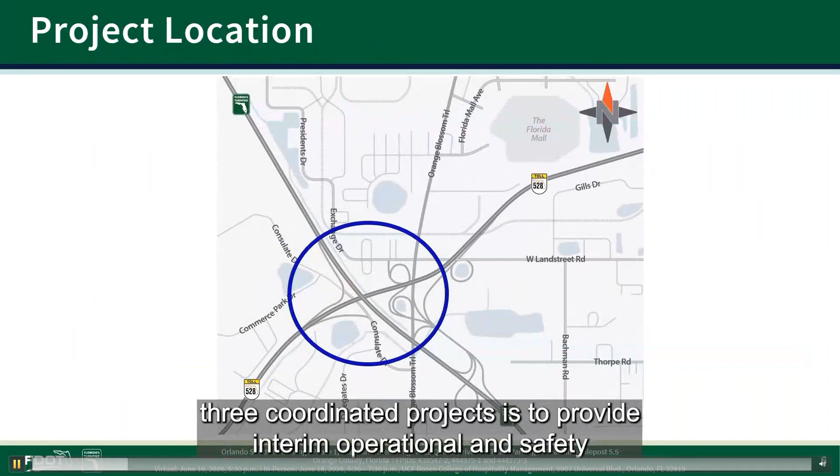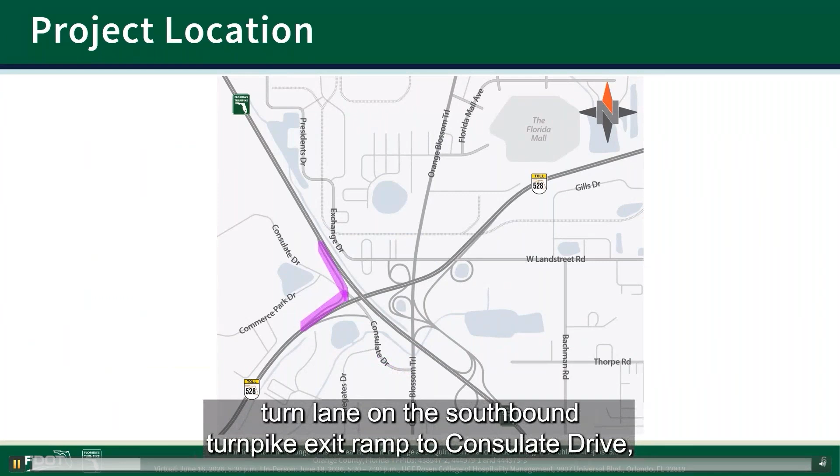The purpose of these three coordinated projects is to provide interim operational and safety improvements at the main interchange between Florida's Turnpike, State Road 91, the Beachline Expressway, State Road 528, and Orange Blossom Trail. These include widening of the left turn lane on Consulate Drive, widening of the left turn lane on the southbound Turnpike exit ramp to Consulate Drive, and extending the right turn lane on Orange Blossom Trail.

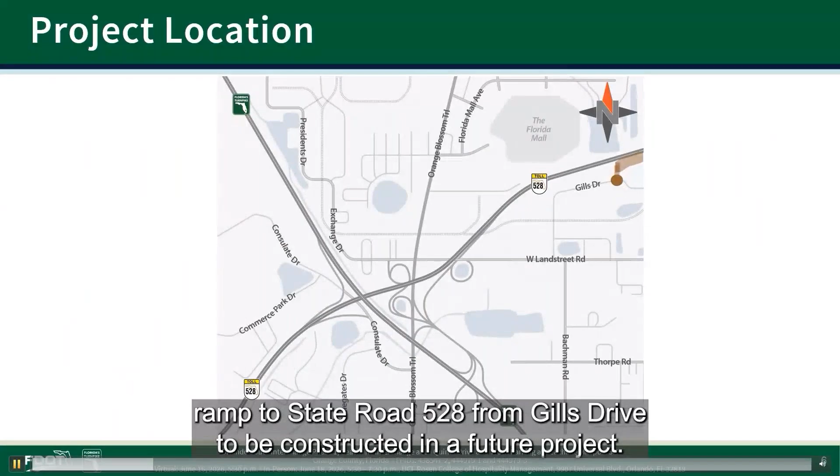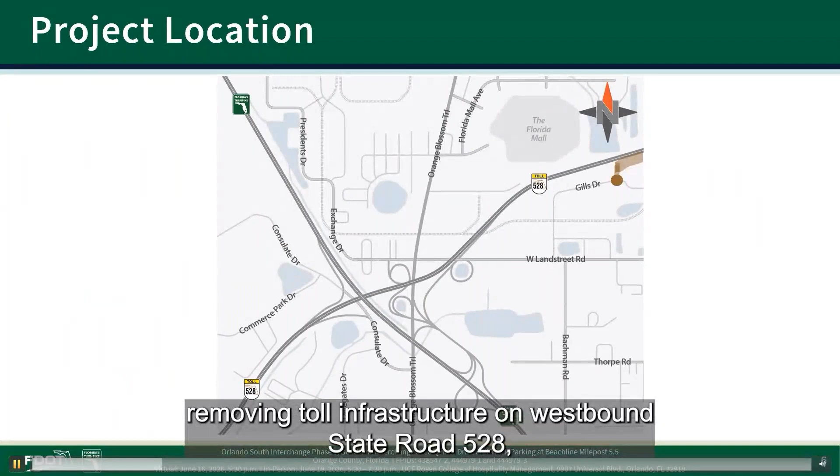In addition, the project introduces a new westbound exit ramp from State Road 528 to La Quinta Drive and a new eastbound on-ramp to State Road 528 from Gills Drive to be constructed in a future project. Together, these projects are aimed at improving access to Orange Blossom Trail and the Florida Mall area, alleviating congestion on State Road 528 and adjacent ramps, removing toll infrastructure on westbound State Road 528, and enhancing safety and traffic flow.

FPID 444979-3 is studying a potential new truck parking facility along westbound State Road 528 near the off-ramp to La Quinta Drive at milepost 5.5.

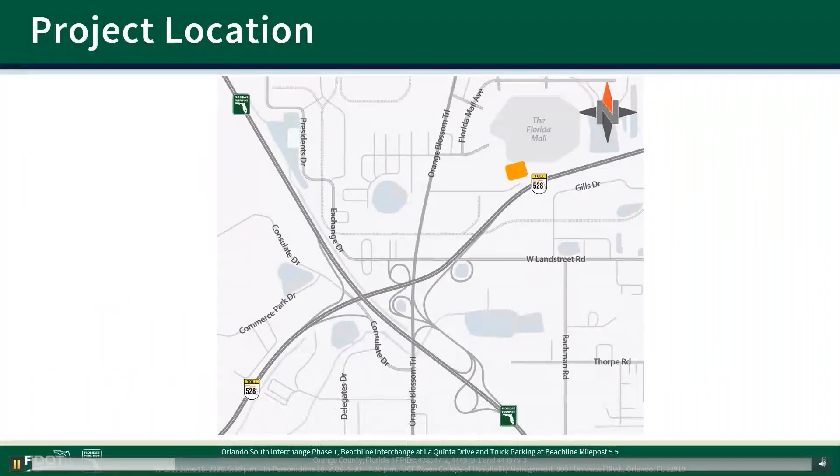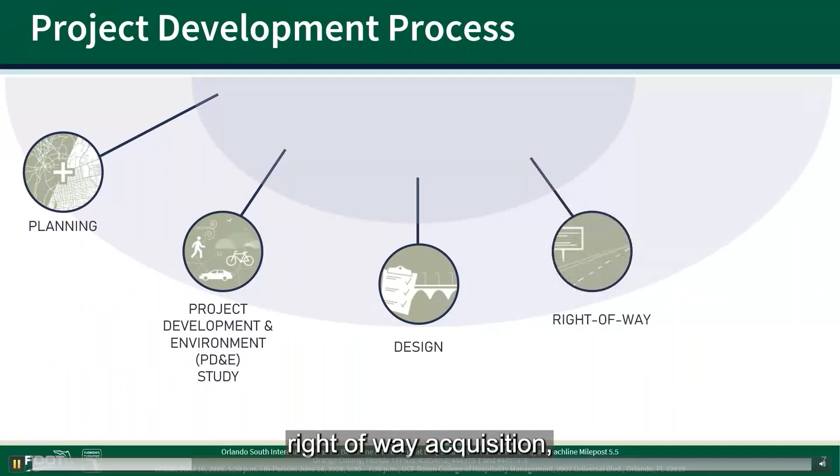Florida's Turnpike Enterprise follows the Florida Department of Transportation's five-phase project development process for delivering needed infrastructure improvements to communities throughout the state. The phases include planning, project development and environment or PD&E study, design, right-of-way acquisition, and construction.

Planning and PD&E phases of this project have been completed, and the project is currently in the design phase. The design phase is when the construction plans and project costs are developed. The design phase is followed by right-of-way acquisition and construction. Right-of-way acquisition is expected to begin in the fourth quarter of 2026. Construction is tentatively expected to start in the first quarter of 2028.

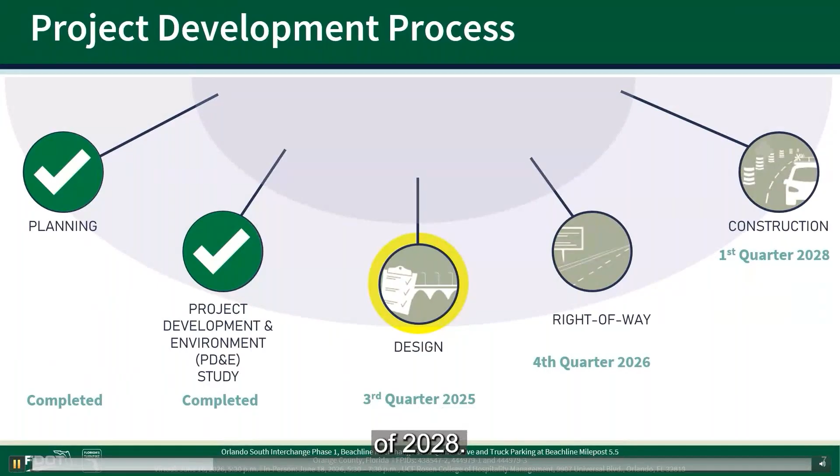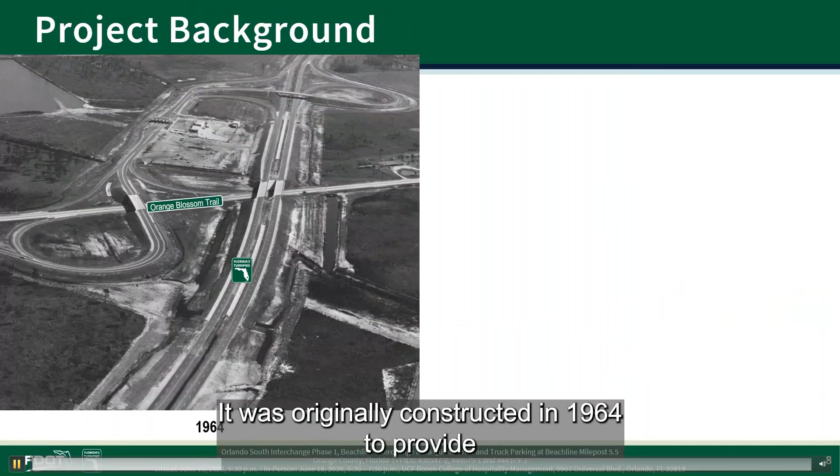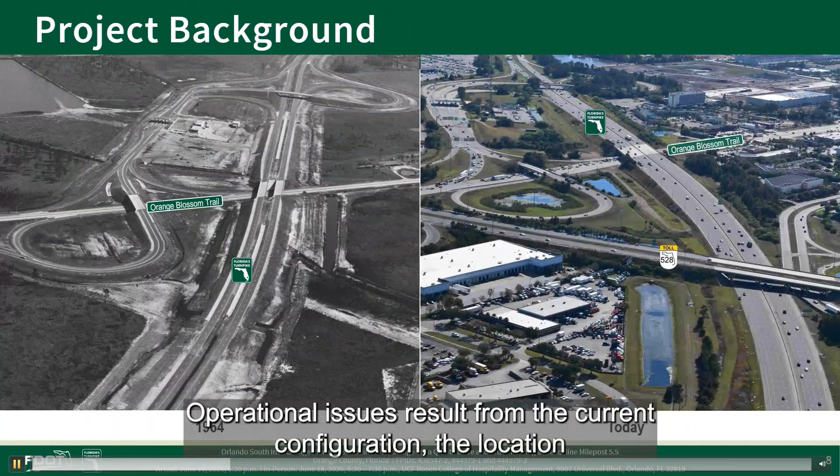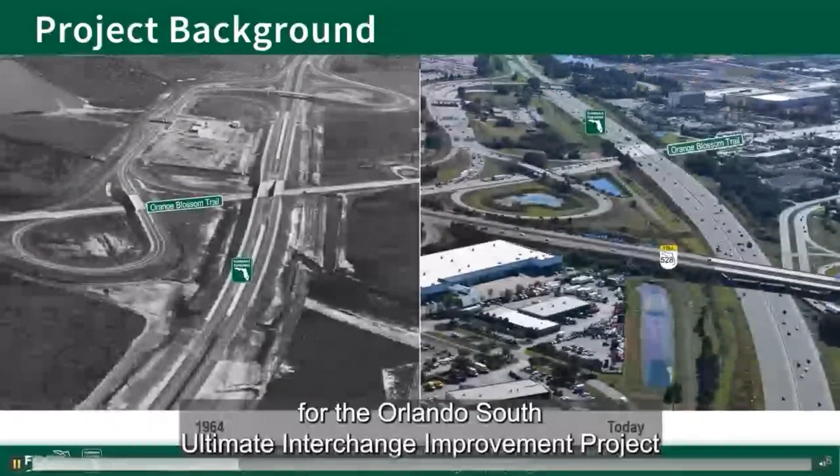The Orlando South Interchange is in Orange County at the intersection of Florida's Turnpike and State Road 528, the Beachline Expressway. It was originally constructed in 1964 to provide turnpike access to Orange Blossom Trail. It has been modified over the years to meet the changing needs of the area and users, and now includes connections to the Beachline Expressway. Operational issues result from the current configuration, the location of the interchange, as well as the volume and characteristics of the traffic. Recognizing the need for improvements, the enterprise completed a PD&E study for the Orlando South Ultimate Interchange Improvement Project in May of 2021.

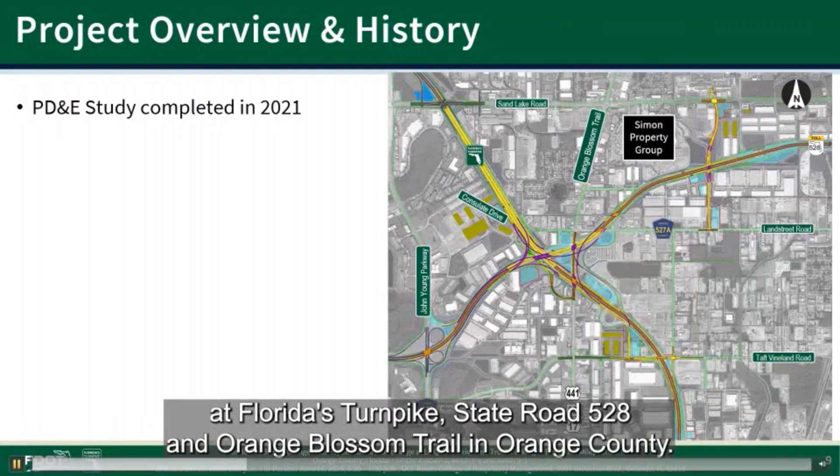On this slide, we have an aerial view of the Orlando South Interchange at Florida's Turnpike, State Road 528, and Orange Blossom Trail in Orange County. North is oriented to the top.

The Project Development and Environment, or PD&E study, was a large regional study which covered 3.4 miles along Florida's Turnpike, 3.8 miles along State Road 528, as well as multiple interchanges. Alternatives were evaluated, and a preferred alternative was selected which met the PD&E study's purpose and need of enhancing safety, addressing traffic demand, improving travel time reliability, providing long-term mobility, enhancing evacuation routes, and avoiding or minimizing environmental impacts.

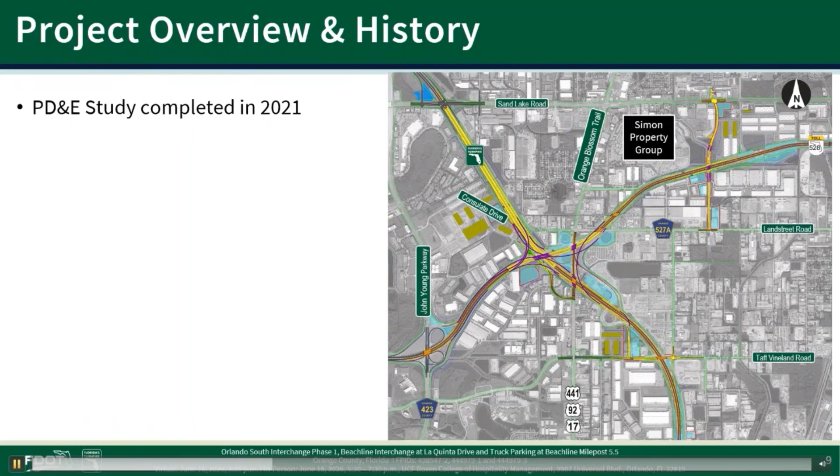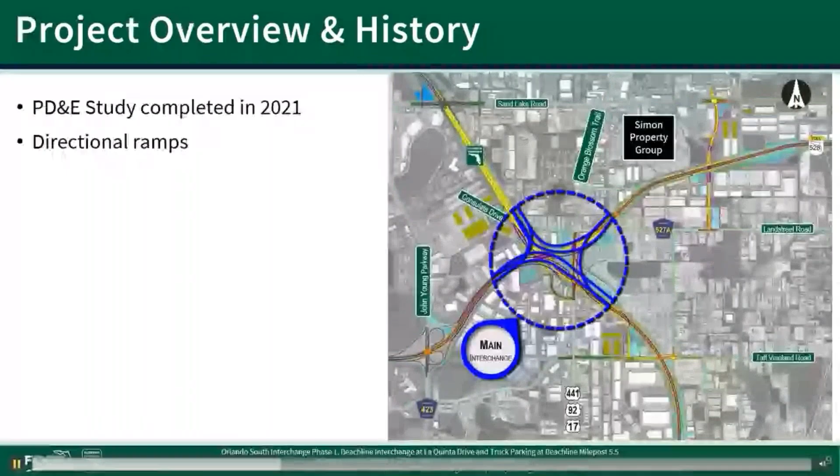The preferred alternative identified in this PD&E study included improvements to the main interchange, including new direct connect ramps between Florida's Turnpike and the Beachline Expressway to improve efficiency. In addition, the Beachline Expressway bridges over Florida's Turnpike would be replaced to allow for additional lanes on Florida's Turnpike.

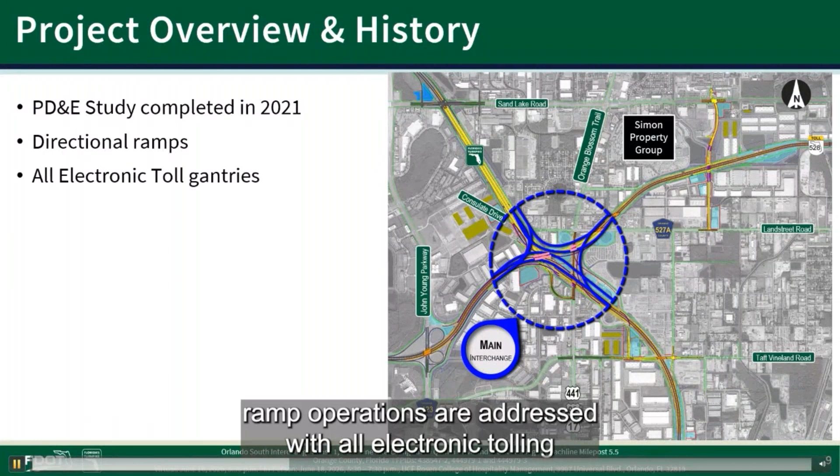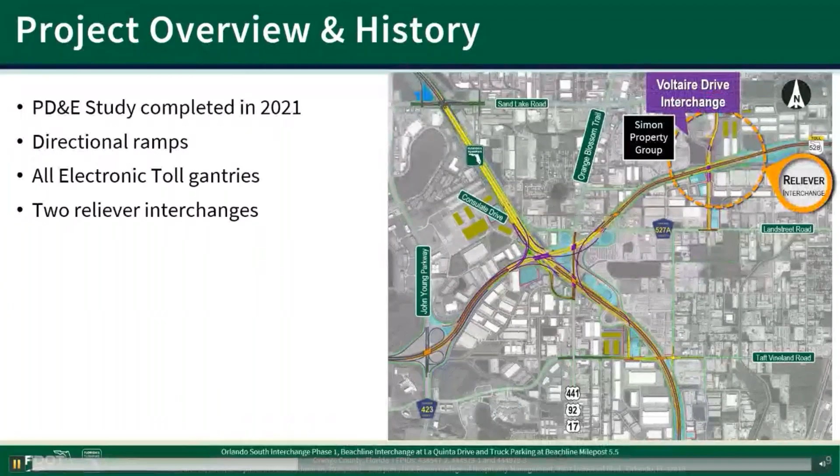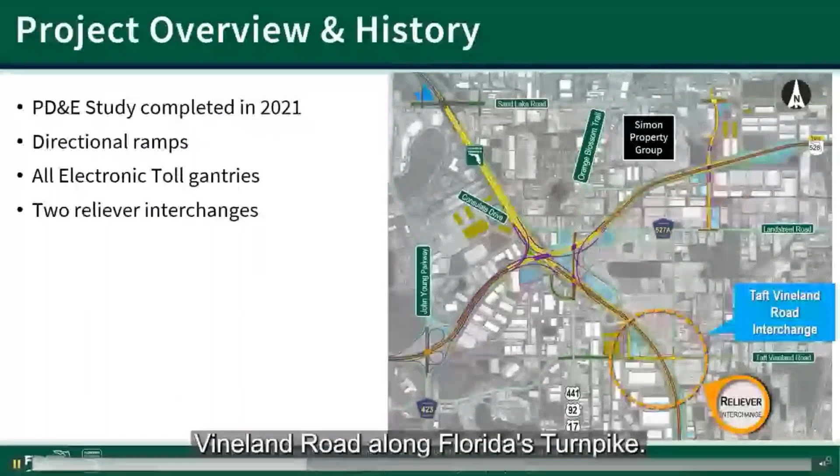Improved ramp operations are addressed with all electronic tolling and the elimination of ramp weaving. The preferred alternative also proposed two new reliever interchanges connected to the local street system. One interchange, known as the Voltaire Drive Interchange, would be constructed just east of the Florida Mall along State Road 528. The other would be at Taft Vineland Road along Florida's Turnpike. In addition, improvements are proposed along Consulate Drive, as well as the Orange Blossom Trail and Consulate Drive intersection.

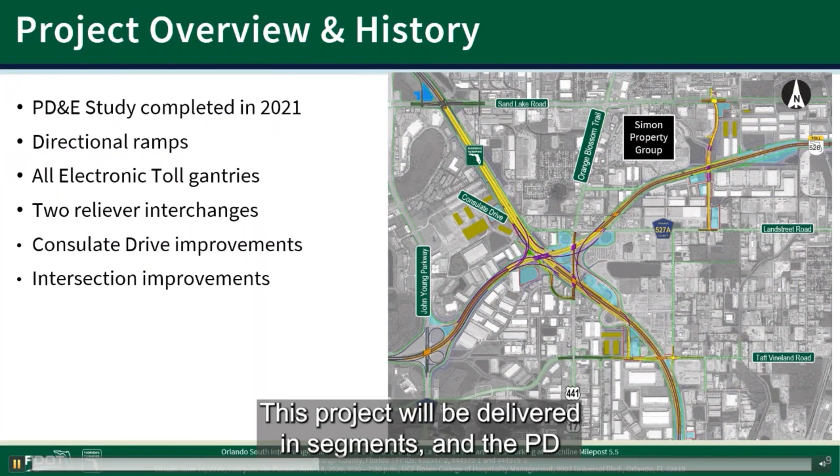Large projects like this are often delivered in segments, and PD&E studies are often reevaluated. This project will be delivered in segments, and the PD&E study is being reevaluated. The first segment slated for construction is the Florida's Turnpike Reliever Interchange at Taft Vineland Road, which is expected to begin construction by the end of 2026.

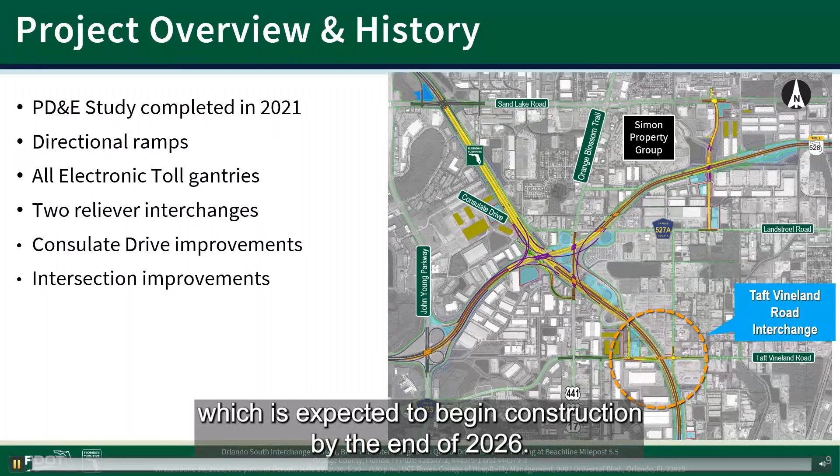The Voltaire interchange recommended in the PD&E study connected the Beachline to Landstreet Road to the south and Sand Lake Road to the north, via a new bridge that crosses the Beachline Expressway and ties into the existing Voltaire Drive. As part of the PD&E reevaluation, which was completed in 2024, the enterprise identified an alternative that minimized impacts, lowered costs, and could be delivered sooner.

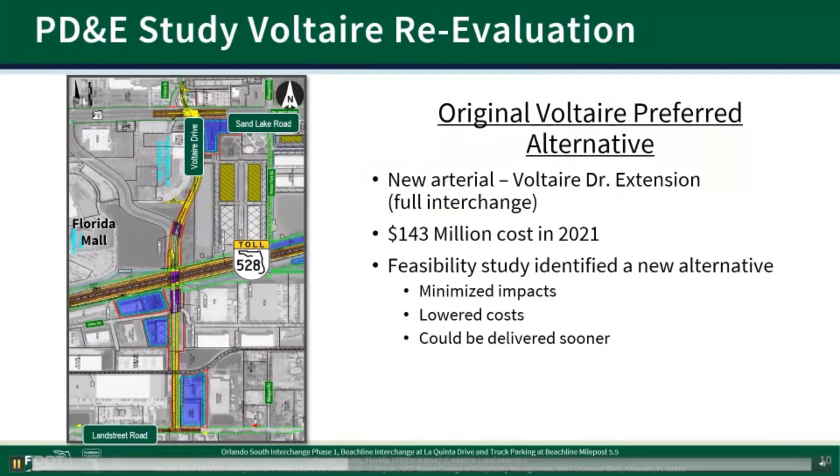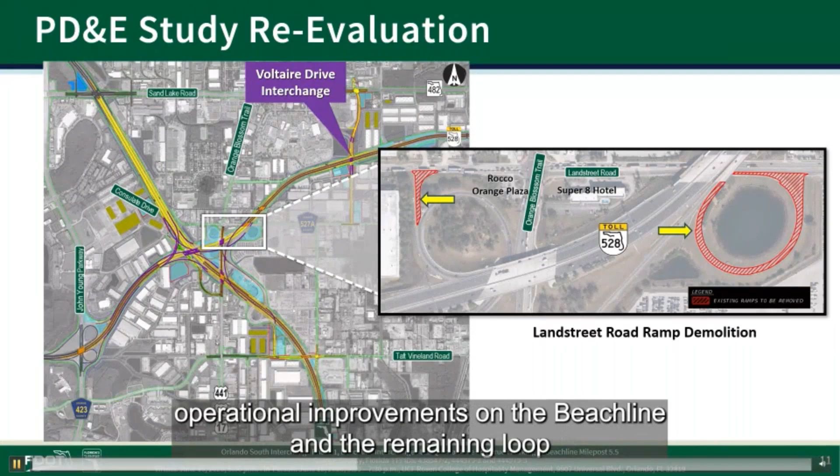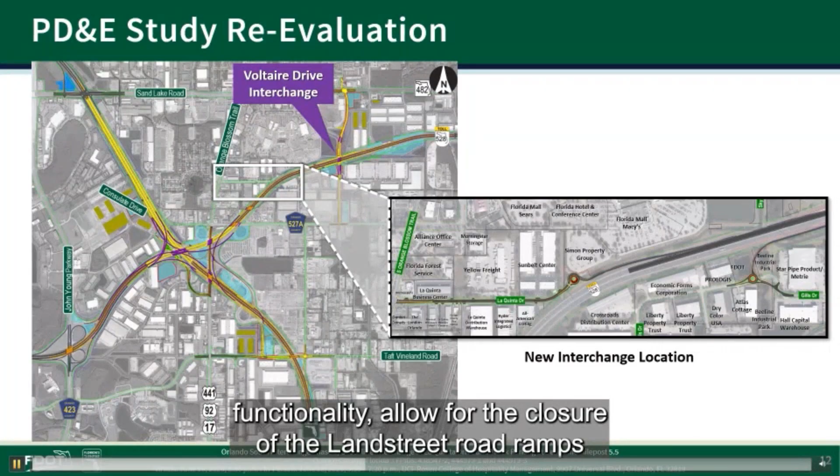The main purpose of the Voltaire Drive interchange was to eliminate these ramps to and from Landstreet Road, reducing congestion along Landstreet Road and its intersection with Orange Blossom Trail, while also providing for operational improvements on the Beachline and the remaining loop ramp. To achieve this, the study recommended an interchange located just west of the Voltaire Drive interchange, which would maintain the same functionality, allow for the closure of the Landstreet Road ramps, and could deliver needed congestion relief in the near term.

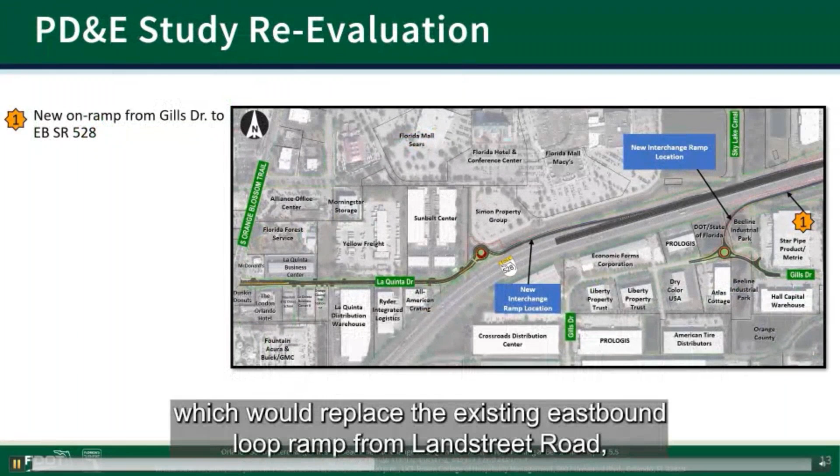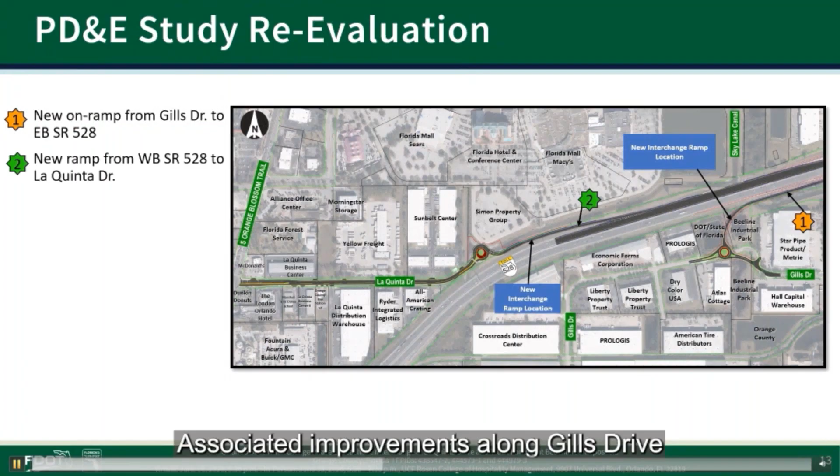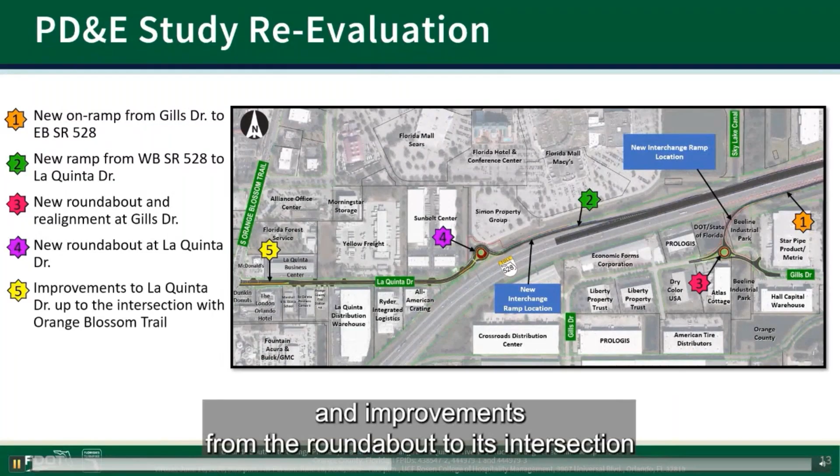The solution consists of a new Beachline eastbound on-ramp from Gills Drive, which would replace the existing eastbound loop ramp from Landstreet Road, and a new Beachline westbound off-ramp to La Quinta Drive, which would replace the existing westbound ramp connection to Landstreet Road. Associated improvements along Gills Drive include realignment and a new roundabout. Associated improvements along La Quinta Drive include a new roundabout and improvements from the roundabout to its intersection with Orange Blossom Trail.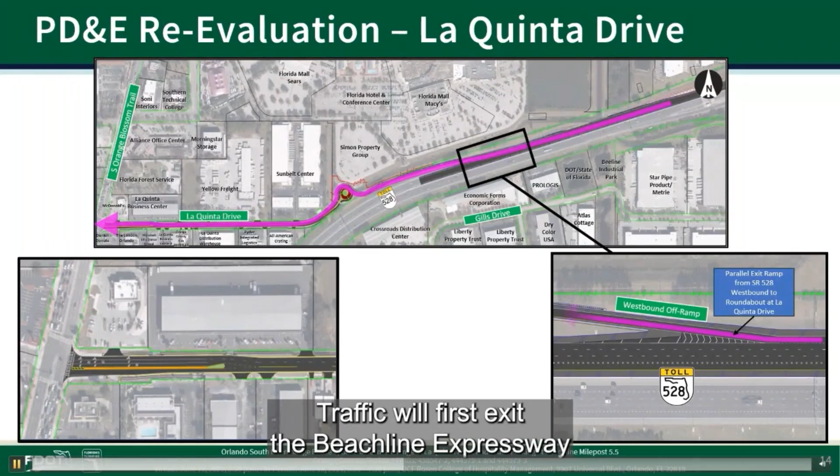The new off-ramp will connect the westbound Beachline Expressway traffic to Orange Blossom Trail via La Quinta Drive. To reach Orange Blossom Trail, traffic will first exit the Beachline Expressway and maneuver through the roundabout and onto La Quinta Drive. The roundabout maintains the function of the existing cul-de-sac by allowing eastbound traffic along La Quinta Drive to turn around and head back westbound.

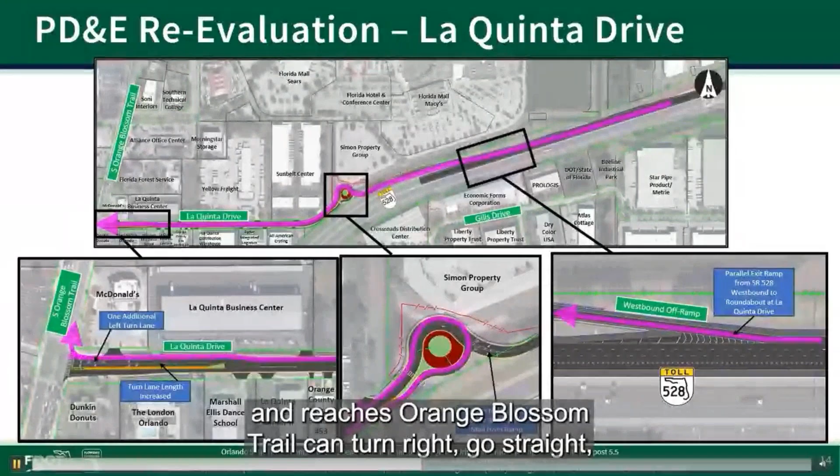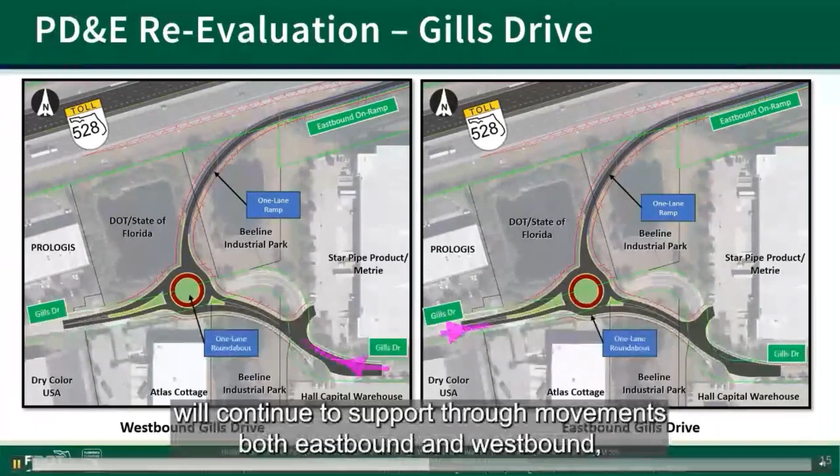Traffic that proceeded through the roundabout and reaches Orange Blossom Trail can turn right, go straight, or turn left using either the existing lane or the additional turn lane constructed as part of this project. The roundabout on Gills Drive will continue to support through movements both eastbound and westbound, while also providing access to the eastbound Beachline on-ramp from Landstreet Road via Gills Drive.

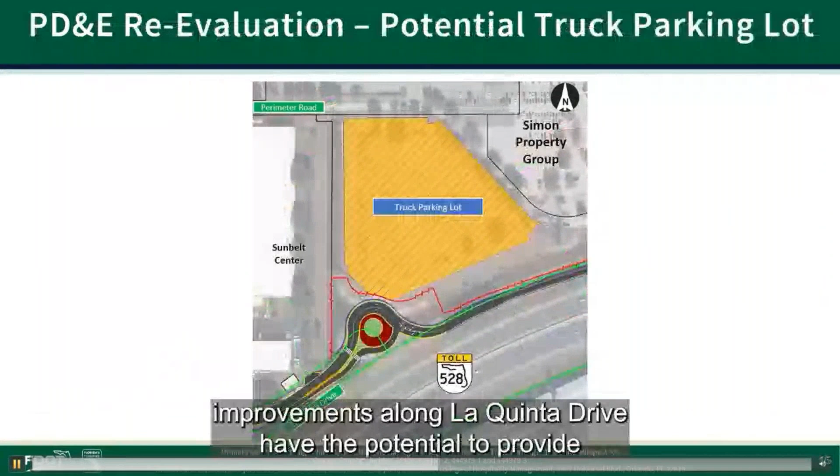The proposed improvements along La Quinta Drive have the potential to provide some relief to the statewide shortage of available tractor-trailer parking. The PD&E reevaluation currently underway is studying locating truck parking in an outparcel owned by the Florida Mall.

Ingress and egress would be via the roundabout.

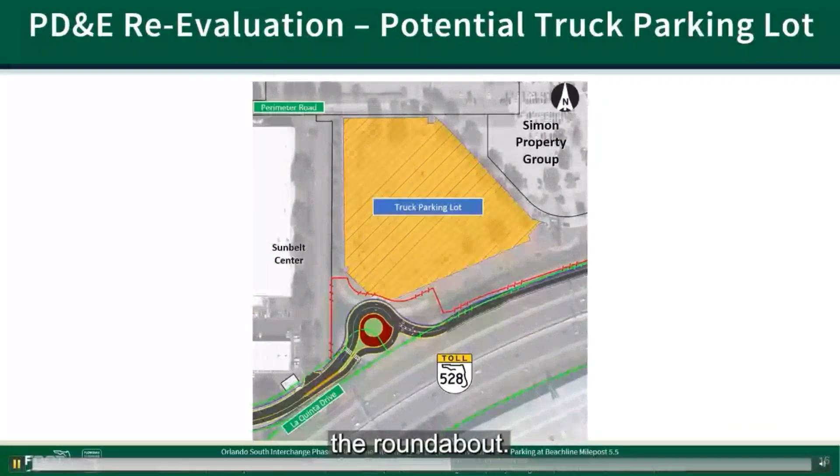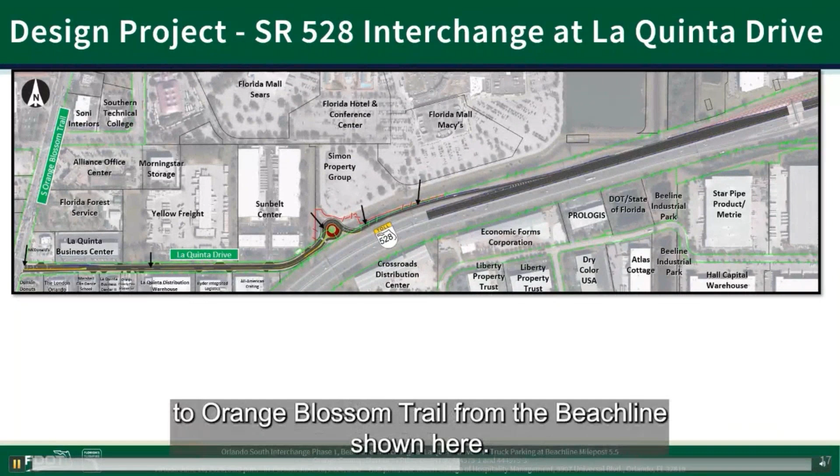Two projects drawn from these PD&E studies have advanced to final design. The first project will construct only the westbound portion of the interchange south of Florida Mall, providing access to Orange Blossom Trail from the Beachline shown here.

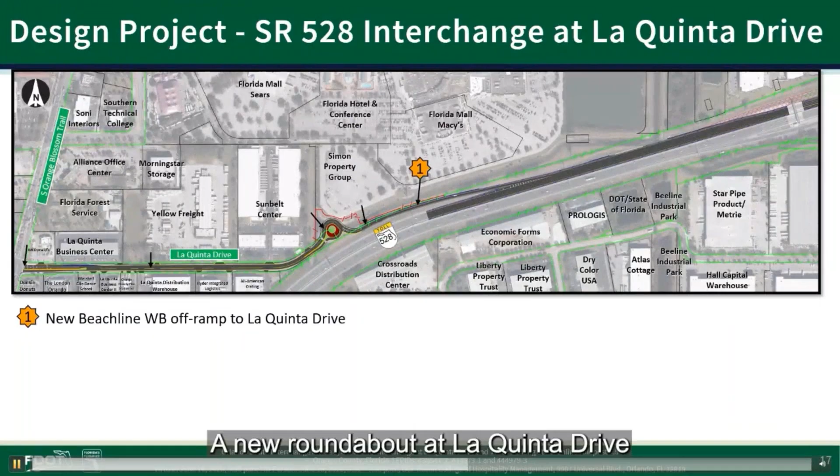The proposed improvements include a new off-ramp from the westbound Beachline Expressway, State Road 528, to La Quinta Drive, a new roundabout at La Quinta Drive, and milling, resurfacing, and restriping of La Quinta Drive to provide an additional westbound lane.

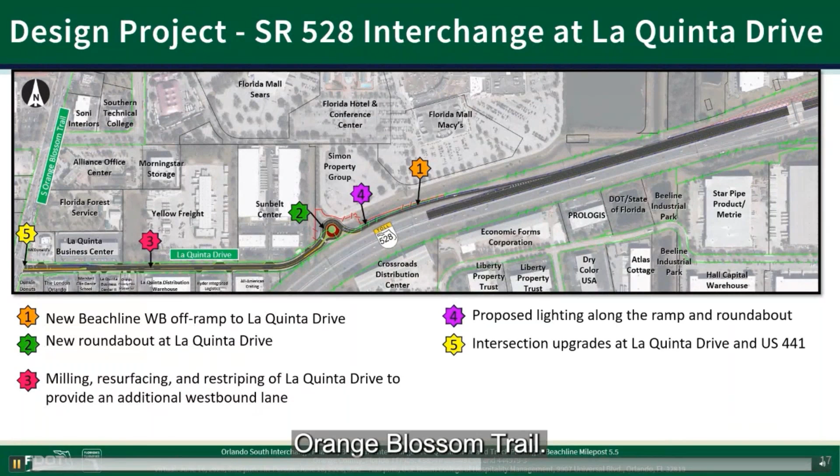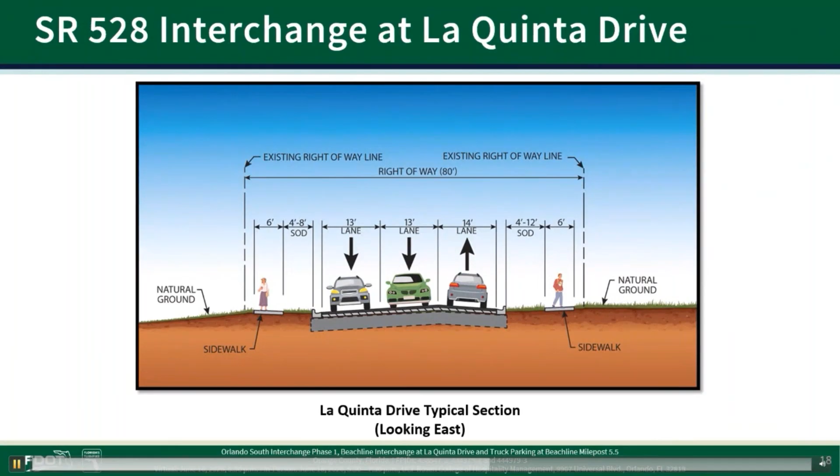The second project currently in design includes interim improvements at the Orlando South Main Interchange, which are the first step towards greater future improvements.

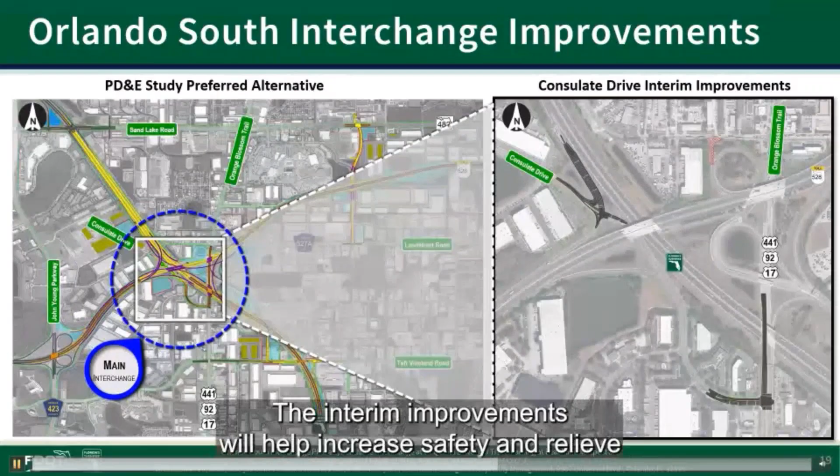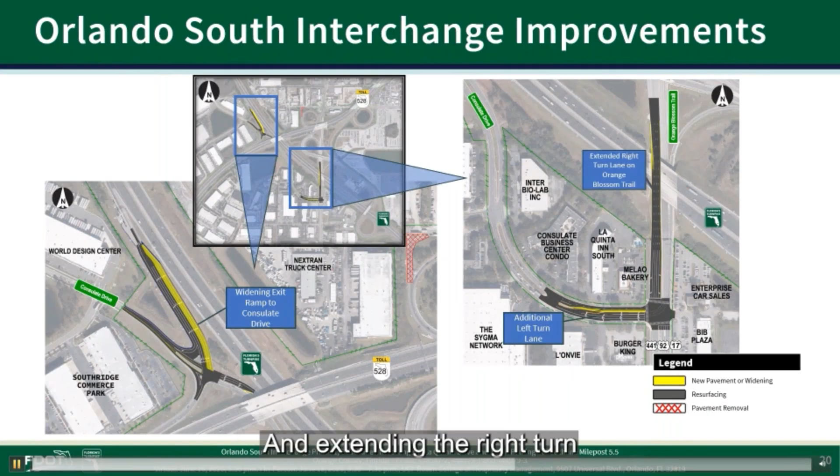The interim improvements will help increase safety and relieve traffic congestion along Consulate Drive near Florida's Turnpike. These improvements include providing 2 dedicated left turn lanes and 2 through lanes on the Florida's Turnpike southbound exit ramp to Consulate Drive, adding a 3rd left turn lane on Consulate Drive at US 441, and extending the right turn lane on Orange Blossom Trail.

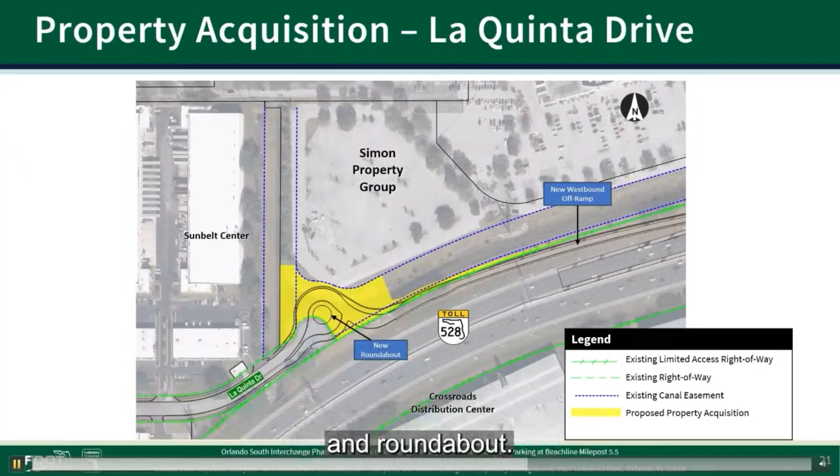This view provides more detail on the right-of-way required to complete construction of the projects currently in design. The westbound off-ramp onto La Quinta Drive will require approximately 1.4 acres of right-of-way for the exit ramp and roundabout. The required right-of-way will expand to 7 acres with the inclusion of the truck parking.

In the future, when the eastbound portion of the interchange is constructed from Gills Drive, it will require approximately 2/3 of an acre of right-of-way for the roadway realignment and roundabout.

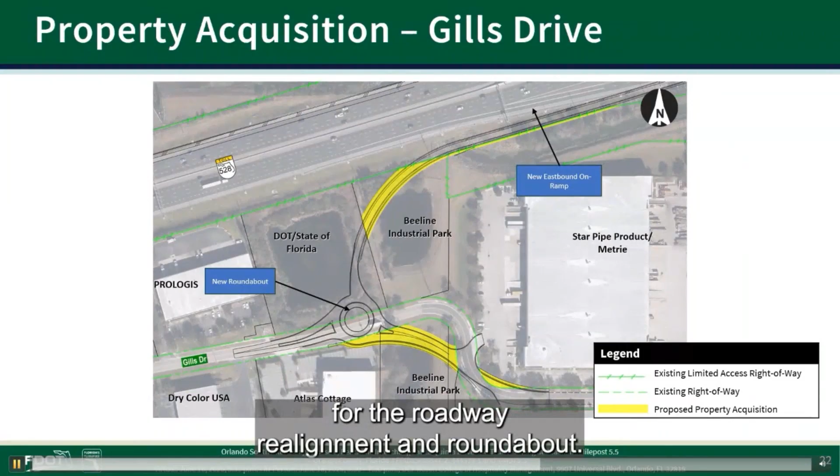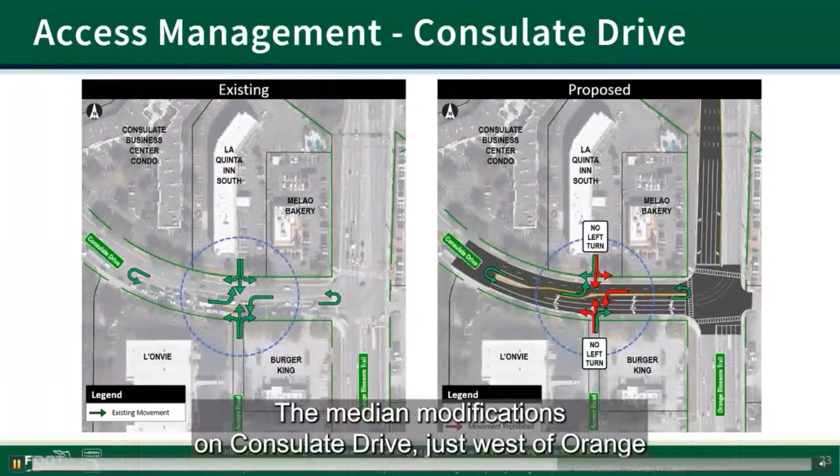The median modifications on Consulate Drive just west of Orange Blossom Trail will prohibit left turn movements. For the parcels on the north side of Consulate Drive, the left turn access into the driveway will remain the same, but the through and left turns for vehicles leaving the driveway will be prohibited.

The left turn access from Consulate Drive onto Access Road will also be prohibited. U-turns at the end of the traffic separator would be permitted.

On the south side of Consulate Drive, a common access road to 4 businesses will no longer have left turns connected to westbound Consulate Drive, and access from Consulate Drive for westbound traffic will be prohibited.

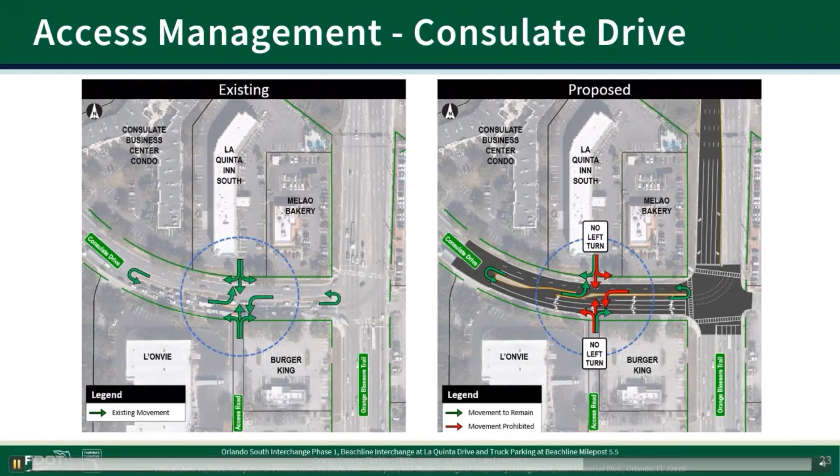Left turns into and out of the parcels closest to Orange Blossom Trail will be prohibited. However, right turns into and out of the properties on both the north and south sides of La Quinta Drive would still be permitted. Drivers from the parcels on the south side of La Quinta Drive needing access to Orange Blossom Trail would have to make a U-turn along La Quinta Drive.

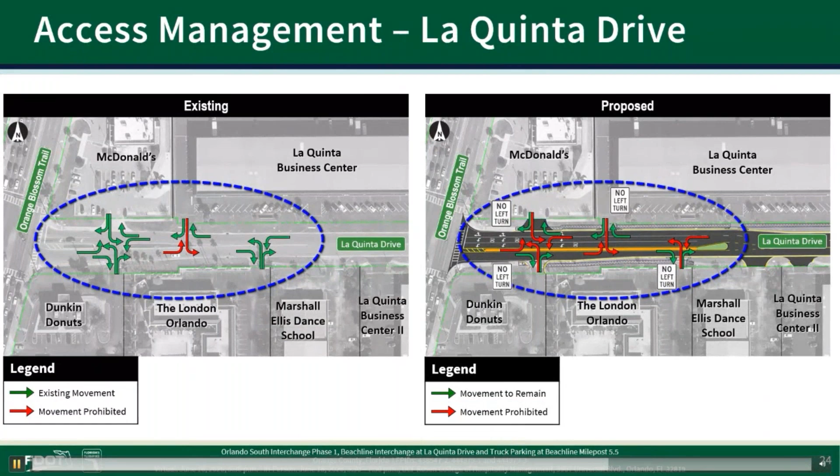A median will be constructed just west of the new roundabout on La Quinta Drive. This means a left turn from eastbound La Quinta Drive into the Sunbelt Center parking lot would now be prohibited. Traffic would still be permitted to make right turns into and out of the Sunbelt Center parking lot along westbound La Quinta Drive.

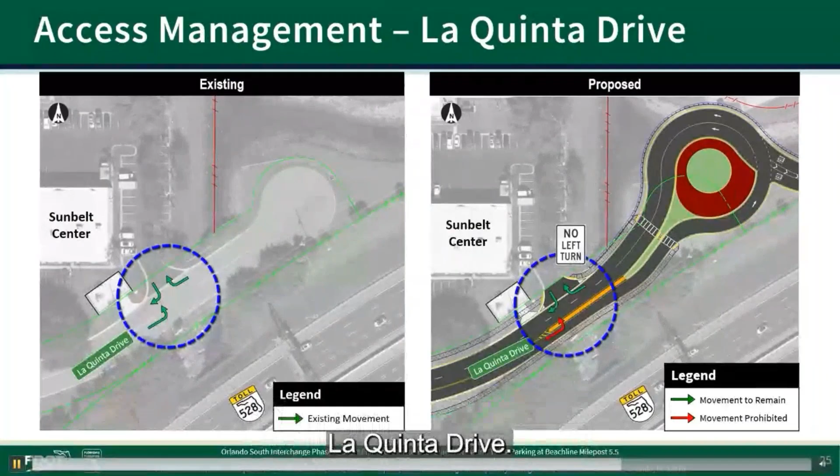There are no access management changes proposed at Orange County Fire Station 53 along La Quinta Drive. However, the increase in traffic volume westbound on La Quinta Drive does warrant the addition of emergency traffic control signals to facilitate the ingress and egress of emergency vehicles.

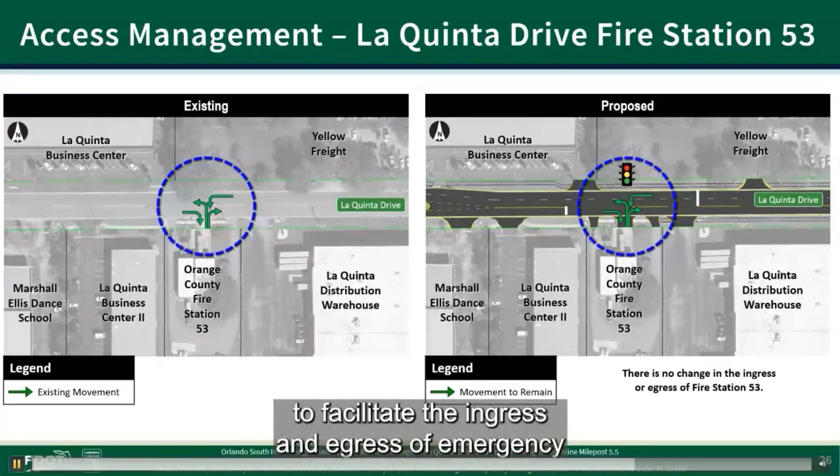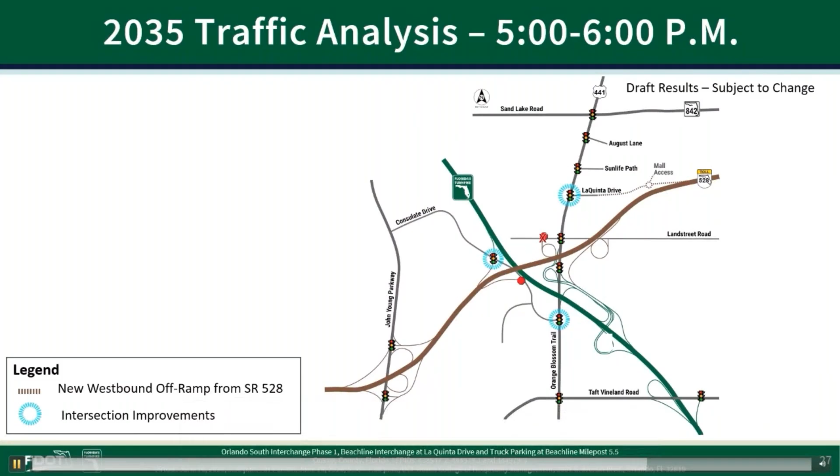Traffic analysis performed confirms the operational improvements resulting from these projects. The analysis includes 8 signalized intersections along the Orange Blossom Trail corridor, from north of Sand Lake Road to south of Taft Vineland Road. Under build conditions, there is an overall 9% reduction in cumulative intersection delay compared to the no-build scenario. In addition to intersection performance, corridor travel times were evaluated for the peak hour between 5 and 6 p.m. in the year 2035.

Along Orange Blossom Trail, the build condition provides travel time improvements in both directions, with reductions in both the southbound and northbound directions. Along State Road 528, the build condition results in substantial travel time savings, with reductions exceeding 50% in both directions.

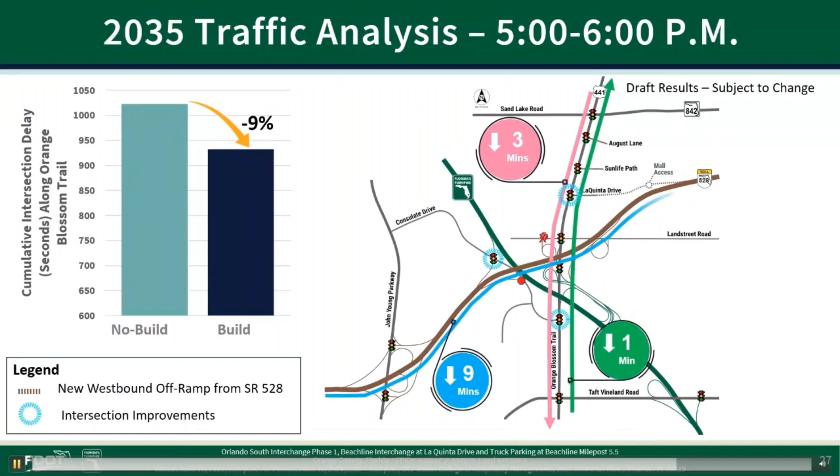That's a 9-minute reduction eastbound and a 12-minute reduction westbound. These results are preliminary and subject to change.

This project provides several important benefits to both travelers and the surrounding community. These include enhancing safety by reducing crashes and creating a safe travel environment. It also improves mobility by making travel times more reliable and accommodating travel demands. In addition, the project supports faster emergency response and evacuation, strengthening overall community safety.

Community awareness is a key priority for Florida's Turnpike Enterprise, particularly before and during construction. Roadway signage will be placed in advance of any closures to keep the public informed. Ongoing communication will be maintained with local stakeholders and agencies. Property owners, tenants, and businesses will also receive notifications to ensure everyone is aware of upcoming construction activities. You can sign up to be on our mailing list on the project website.

Safety is our top priority throughout the construction project. Work zones are designed to protect both workers and travelers. Traffic pattern changes will be minimized wherever possible to reduce disruption, and traffic will be maintained throughout construction. Nightly lane closures may occur, and occasional nighttime detours will be required for limited construction activities.

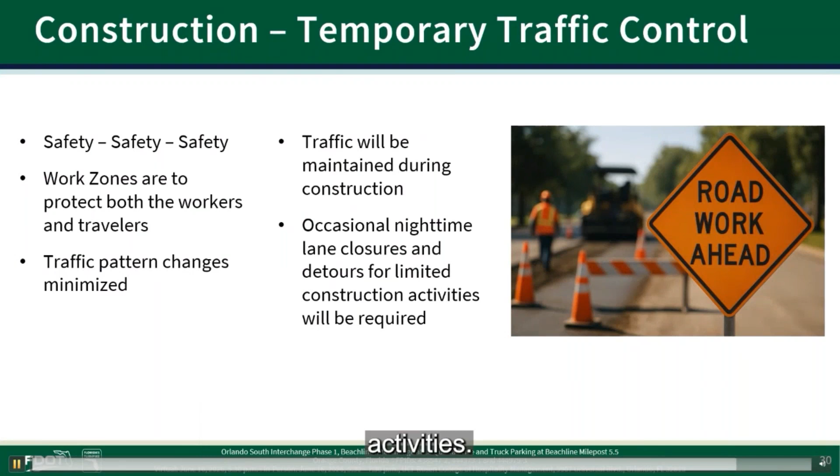This slide highlights key milestones for this project. The design phase began in the third quarter of last year. Following tonight's public information meeting, a public hearing is scheduled for December 2026. Both are to share updates and gather input from stakeholders and the community. The right of way acquisition process is expected to begin in the fourth quarter of 2026, and the construction letting is scheduled for the first quarter of 2028. Please note this schedule is subject to change.

Your comments are essential to this process and will help Florida's Turnpike Enterprise understand your concerns and suggestions for improvements. You may email the project manager directly or submit your comments by U.S. mail. While written comments and questions are accepted at any time, we ask that you provide comments connected with this public meeting by June 29th, 2026. Please note that all questions and comments received related to this project will receive a response in writing.

To view the documents presented at tonight's meeting, find more information on this project, or submit questions online, please visit the project website at https://www.floridasturnpike.com/OrlandoSouthInterchange, or scan the on-screen QR code now.

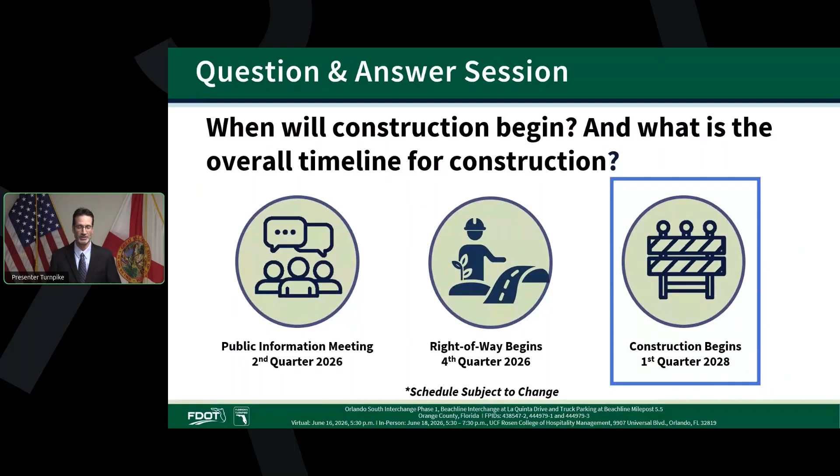For more information about the project, you can visit the project website at www.floridasturnpike.com/OrlandoSouthInterchange to explore the public information meeting exhibit room and submit any additional questions or comments. A recording of this public information meeting will also be available on the project website.

Finally, the Florida Department of Transportation, Florida's Turnpike Enterprise, would like to remind everyone that June is Safe Summer Travel Month. During the holiday and vacation season, Florida's roads can be some of the busiest in the country. Speed limits are in place to keep you and those around you safe. Together, we can create a safer summer for all by slowing down and staying cool on the road.